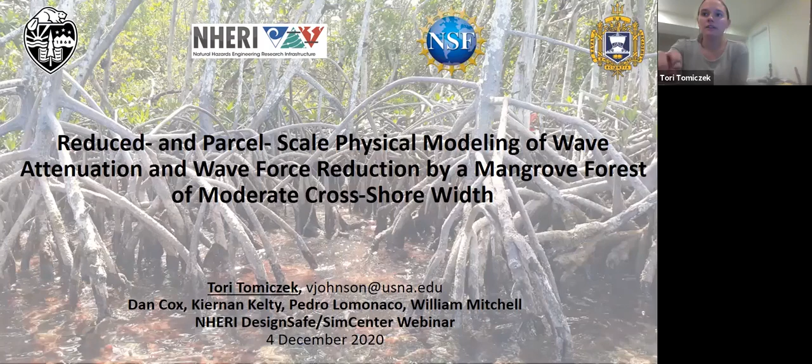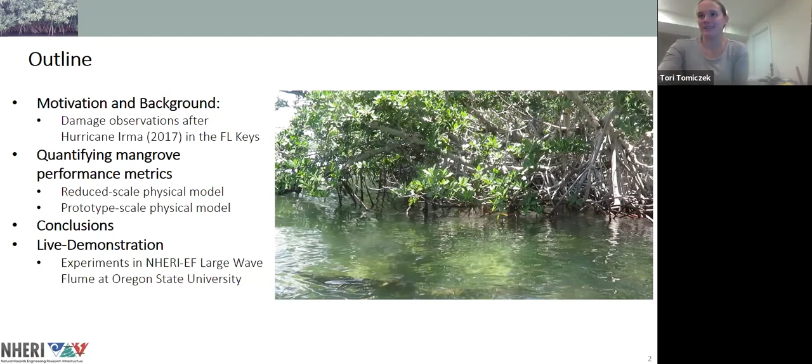Then I'll jump over to a live demonstration where we'll actually show you we're running waves today before sort of wrapping up, and I'm happy to take any questions.

So as Matt mentioned in the introduction, natural and nature-based features are an emerging area of research for coastal resilience and coastal hazard mitigation. It's very important to understand how these systems perform, not just from an ecological perspective, but also from an engineering perspective in terms of wave energy dissipation, load reduction, and flood storage capacity.

Here you can see some of the examples of natural and nature-based features implemented in urban environments. These are concept designs right now, but I think these designs are moving forward, such as the Big U in New York City, the Emerald Tutu in Boston Harbor, as a design idea. And also this Fort Pierce Marina, it's actually a constructed island living breakwater that's being used to protect the marina. This was identified in the NHERI 5-year science plan as an important area of future research.

The background and motivation for this study again occurred after Hurricane Irma in 2017. Here you can see some of the hydrodynamic conditions that occurred during Hurricane Irma. The track of Hurricane Irma is indicated by the black line you can see in each of the panels. And we've plotted the Coastal Emergency Risks Assessment hindcast of the inundation depth, significant wave height, and wind speed produced by the storm. Our study area was Key West and Big Pine Key, which are indicated by these black boxes in each of the panels.

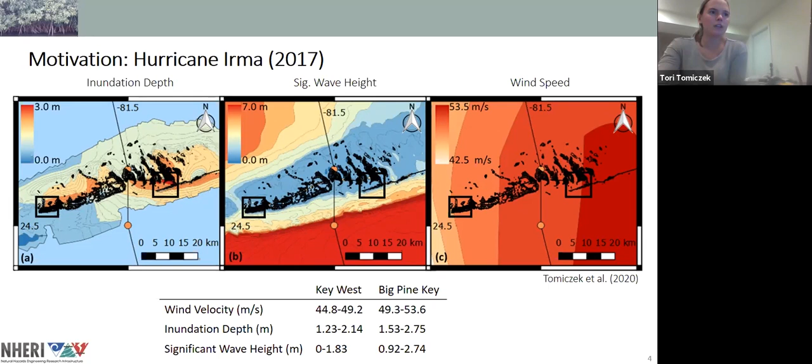We, after the storm, performed damage assessments, evaluating damage on a 4-point scale to the roof, walls, landscaping, and attached structures, foundation, and also the shoreline. Our goal here was to understand relationships between shoreline damage, structural damage, and hazards, as well as to understand how shoreline management could affect damage and recovery.

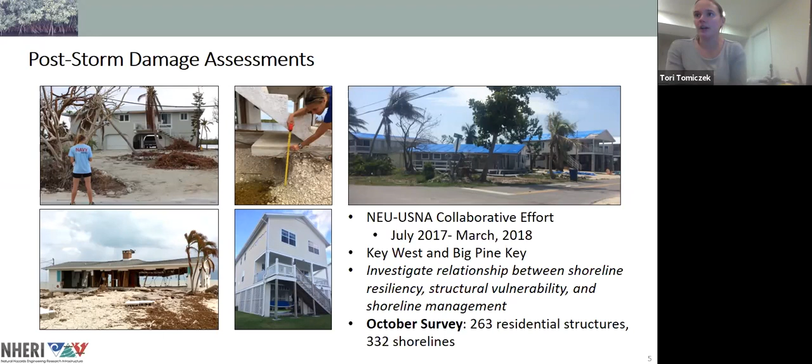We were able to survey 263 residential structures just 1 month after the storm made landfall. We actually arrived in the Florida Keys the day that they reopened to tourism, and so we were there before many of the reconstruction activities had started to take place. We also performed assessments of individual shorelines.

One thing that's very unique about the Florida Keys, you can observe in the picture on the upper right-hand corner of this slide. This shows an overhead view of one of the neighborhoods in Key West. This is actually a Naval Air Station housing facility where you can see, as is common with many naval stations, all of the building footprints look nearly identical.

But what's very different about each of these building parcels, particularly the waterfront parcels, is that as you move from the northern to the southeastern edge of this shoreline, you see a wide variety of shoreline archetypes. So this top one here has a sandy beach. We have mangroves as you move further south, and then finally stretches of revetments with sparse mangroves in between. And this was very common, this parcel-scale shoreline variability.

I've shown you some pictures of the damages that we observed for various shoreline archetypes. Overall, one thing that really struck us during this field trip was how well mangroves performed during the storm. Only 1 month after the storm, we already saw signs of regrowth, and many of them looked unaffected by the hydrodynamic and wind conditions associated with Hurricane Irma, particularly in Key West, where the wind was not quite as extreme.

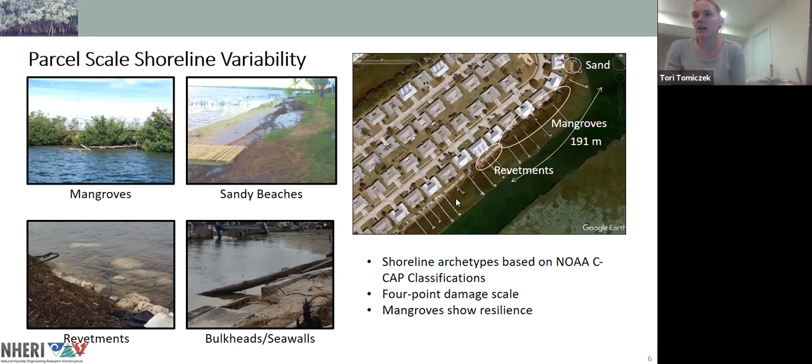Sandy beaches tended to be completely washed away, completely eroded after the storm. This may be in part due to the fact that Key West is built on lime rock, and so there's not a lot of native sand to the area, and so most of the sand was just washed right offshore. We also observed damage to revetments and bulkheads in the form of partial collapse of bulkheads, stone displacement in revetments.

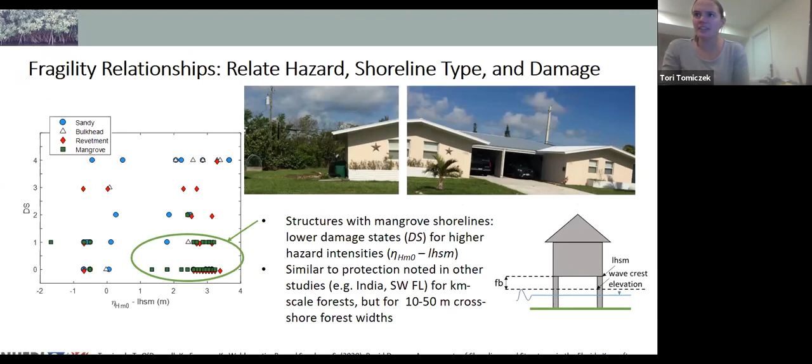In our initial assessments, we attempted to relate the hazard intensity measures that we were able to obtain from the storm hindcast to the damage condition observed by the storm. And so the hazard intensity measure that we defined was the freeboard, which we defined as the elevation of the wave crest above the lowest horizontal structural member.

So this elevation of the wave crest eta minus the elevation of the lowest horizontal structural member above ground. As that gets bigger, more and more of your house is inundated by the wave. So what we expected to see was, as this parameter increased, more and more structures experienced high damage. If you just look at this figure right away, it looks a bit like a cloud, which was somewhat discouraging at our first pass.

It wasn't until we separated each of our structures by its shoreline archetype that we realized that most of the structures that experienced these severe hydrodynamic conditions but low damage states were structures that had mangrove shorelines, indicating that mangroves had provided some sort of protection during the storm. And this is actually not so new.

There's a lot of other excellent studies out there that noted similar protection by mangroves during hurricane as well as tsunami events in Florida and Asia. But these studies often noted this protection occurring over kilometers of mangrove forests rather than the football field size mangrove forests or even smaller cross-shore widths that we observed in the Florida Keys.

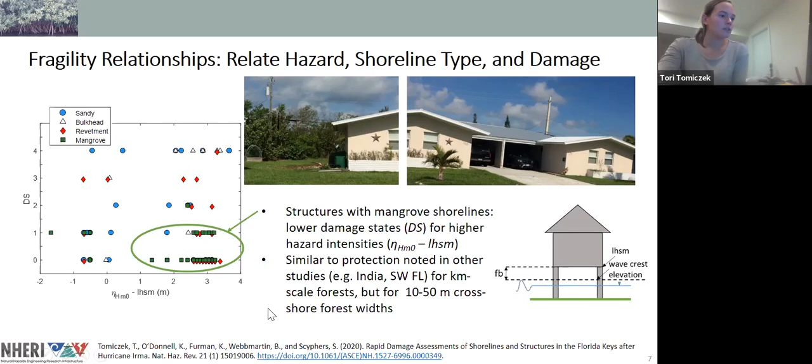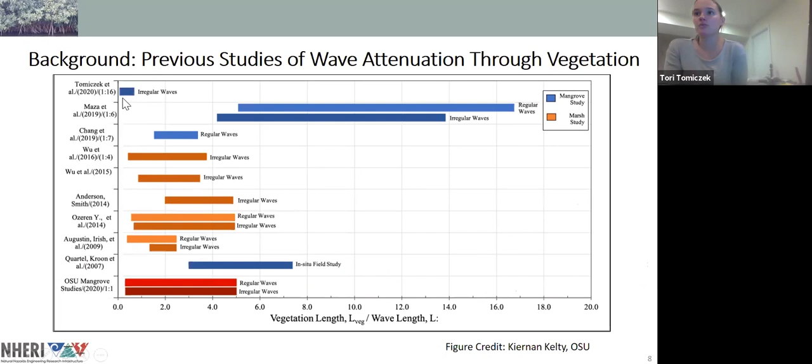And so here you can see again some other previous studies of wave attenuation through vegetation, with many of them focusing on long mangrove or vegetation widths compared to the wavelengths. We were observing this protection occurring at fractions of the wavelength. And so this is what we set about to do with our reduced scale physical model. Before we could build our reduced scale physical model, we actually went back into the field to learn a little bit more about mangrove geometric and mechanical properties.

So we went out to the field and we measured mangrove prop root diameters, trunk diameters, prop root density, as well as elasticity. We also consulted some excellent literature sources that talk about how to parameterize a mangrove tree based on the diameter at breast height. And we constructed a 1:16 scale of the mangrove forests that we observed in Key West, which you can see here.

One thing you'll notice right off the bat is we removed the canopy. In part, this was because we didn't want to worry about the scaling effects, and also because most of the hydrodynamic properties owing to the storm surge and waves were interacting with the trunk and prop roots.

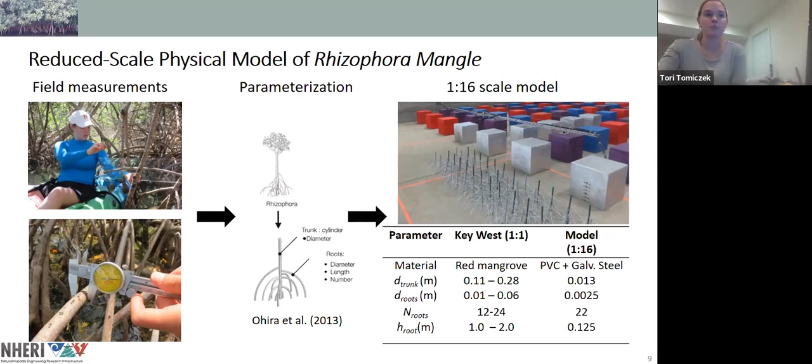These experiments were actually part of larger tests at Oregon State University. These were done in collaboration with Oregon State University, the University of Notre Dame, University of Southern California, University of Hawaii, and Hanyang University. And they investigated things including macro roughness, effects on hydrodynamic transformation, effects of seawalls, debris, and then we included the vegetation component.

One thing that was really exciting about this test setup is that we were able to use 2 pumps, which we installed behind these wave dissipating revetment structures, and they allowed for the creation of a continuous flow so that we could superimpose waves over trailing currents.

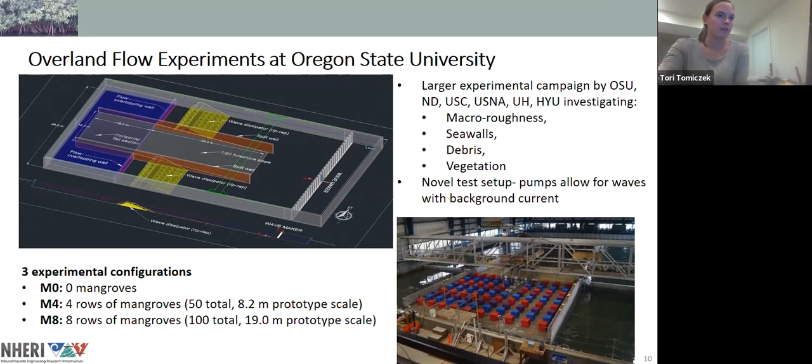We considered 3 experimental configurations placed directly in front of the macro roughness elements on the horizontal test section. The first one, our baseline configuration, considered 0 mangroves. Our second configuration considered 4 rows of mangroves, which corresponds to about an 8-meter prototype scale width. And our third configuration considered 8 rows of mangroves, or 19 meters of cross-shore width of mangrove protection.

Here you can see another close-up view of our mangrove specimens, as well as some of the instrumentation we used during the tests. We considered a lot of instrumentation used solely to characterize hydrodynamics, including acoustic Doppler velocimeters, wire resistance wave gauges, and ultrasonic wave gauges, which were positioned both along the slope to characterize wave transformation, as well as in front of and behind the mangroves to determine effects of the mangroves on wave transformation.

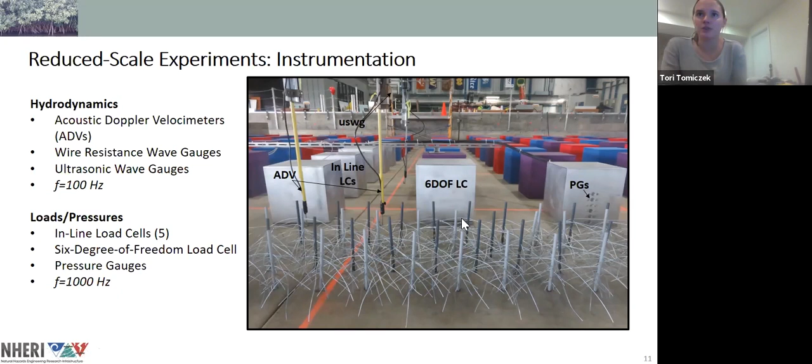Each of these silver structures was also instrumented with either a load cell or array of pressure gauges. The one that was shielded the most by the mangroves was the 6 degree of freedom load cell, which is the one that I'll be showing in a couple of slides.

Here you can see a video of the tests, as well as the 3 different wave configurations that we considered. I'm going to let the video play again, but when I do, have a look at how the splash up changes as you look at the shielded silver boxes compared to the unshielded red boxes.

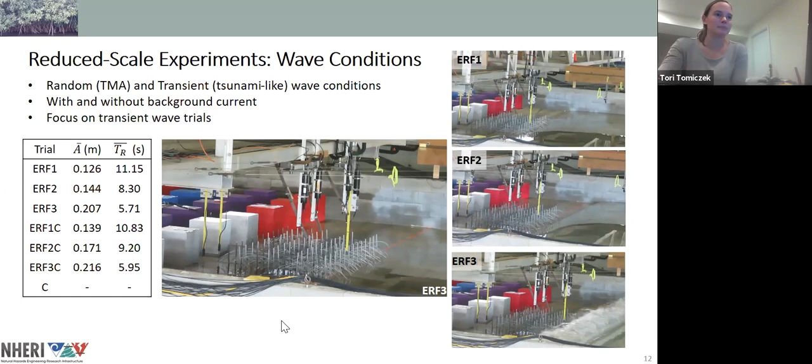All right, it might be having an issue with the playback, but I can tell you that the unshielded boxes actually had a very noticeably larger splash up than the shielded boxes, which was observed for all of our wave trials. We considered irregular as well as long tsunami-like waves. Today I'm going to focus on the tsunami-like wave conditions, in which we increased the wave period while reducing the wave amplitude.

Here you can see a time series of the water surface transformation behind our mangroves. This is located at a gauge in a side street directly behind our mangrove configurations, as well as the cross-shore velocity transformation as you move from a no mangrove case to 4 rows of mangroves to 8 rows of mangroves. The black lines in each of these time series indicate the 0 mangrove case, while the blue dashed line and orange dash-dot line represent our 4 rows of mangroves and 8 rows of mangroves, respectively.

One thing that we can notice right away from these figures is, considering the water surface elevation, we actually see an increase in water level behind the mangroves when we added mangroves compared to the 0 mangrove case. We also observed that there wasn't a large difference between the M4 and M8 configuration, indicating that adding mangroves had more of an effect than adding more mangroves. So the presence of mangroves was more important than the 2 different cross-shore

widths that we considered. Similarly, we observed for the water velocity that the water velocities tended to decrease more quickly when you added mangroves. But again, there wasn't a very large difference between the M4, 4 rows of mangroves, or 8 rows of mangroves.

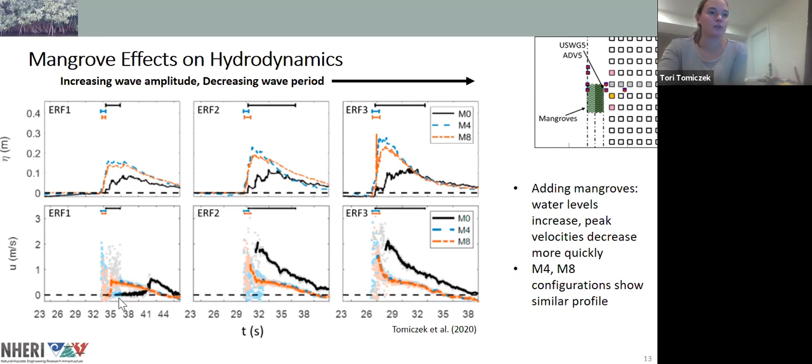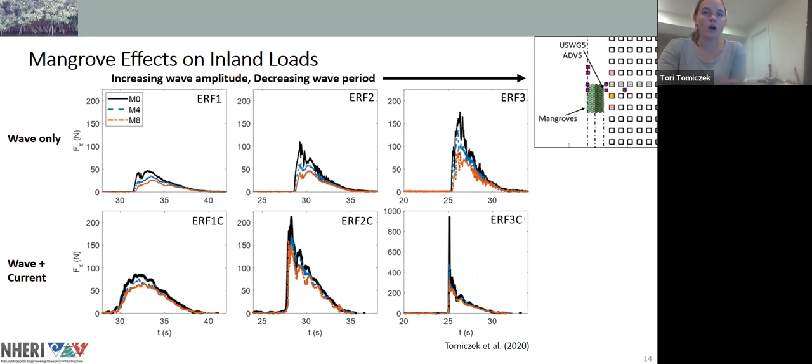We also considered mangrove effects on inland loads using the 6 degree of freedom load cell that I showed a couple of slides ago. That's shown here in this gold box. And again, we can see that as you move from the M0 or black lines for all of the wave conditions tested to the 4 rows of mangroves to 8 rows of mangroves, we see a clear reduction as you add more mangroves.

This is good to show qualitatively, but we also were able to quantify that reduction by comparing the actual force measured against the increasing wave period, as you can see in this left-hand panel. And so in this left panel on the x-axis, we have our representative wave timescale, and on the y-axis, we have the cross-shore force measured by the 6 degree of freedom load cell. Black circles indicate our no mangrove baseline configuration. Blue triangles indicate our 4 rows of mangroves, and orange squares represent 8 rows of mangroves.

The shaded symbols indicate trials that we ran in the presence of a background current, while the hollow symbols indicate trials that we ran with just waves over still water. And you can see that for all of our cases, as we added mangroves and added rows of mangroves, we saw a reduction in overall force. So these vertical lines indicate the same trial adding mangroves.

We also see that as the wave period increased, the total force on the structure decreased in general. This was in part due to the fact that we also reduced the amplitude as we increased the wave representative timescale. This right-hand panel shows our cross-shore distance of shielding mangroves on the x-axis and our force on the y-axis. So you can follow a similar wave condition by following the same symbol.

So our ERF3 was our shortest wave with the largest amplitude. We see it has a very large force when there's no mangroves, which is reduced quite a bit when we added 4 rows of mangroves, and even more when we added 8 rows of mangroves. But one thing that we noticed about all of our trials was that this load reduction was not linear.

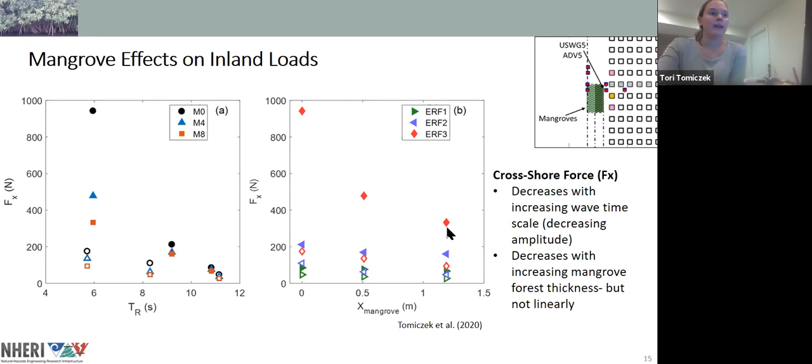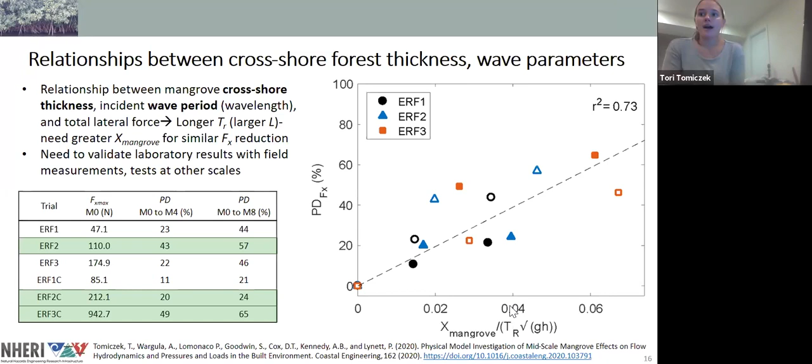While this is promising, there's still a lot of questions that remain. And one of the biggest questions is, how does what we saw in the lab with these reduced scale tests actually scale up into real world mangrove systems? And so one thing that I think is really important to understand in natural and nature-based features is how the work that we're doing in the lab scales up to represent real world systems.

One note that you always have with lab experiments is that it's very, very challenging to match your Reynolds number unless you do this at full scale. And so while our Reynolds numbers for our 1/16 scale tests were high enough to ensure turbulent flow and inertial forces dominated viscous forces, we're still orders of magnitude less than what you would expect in a real world system.

And so I'm really excited about projects that we have ongoing right now with the Army Corps of Engineers and the project that I'll show you at Oregon State University, where we're actually constructing large scale versions of these mangrove specimens to see how wave transformation scales as you move from 1/16 to 1/2 scale to 1/1 scale, which is the test that we're running at Oregon State University.

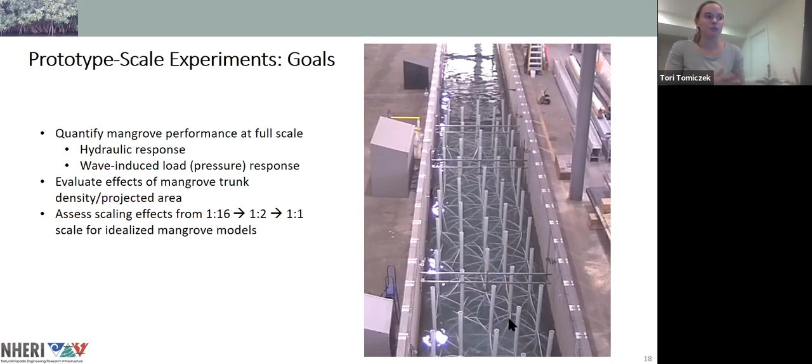And then finally, as I mentioned, we're really excited to assess how these systems, all constructed similarly, scale from reduced 1/16 to large 1/2 scale to full scale that we're doing in the large wave flume. Here you can see a view of the experimental layout.

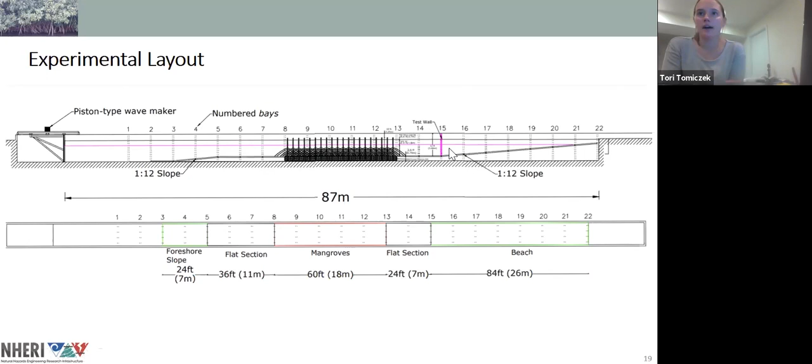We're in the large wave flume, so upon wave generation, waves propagate over a flat section before they go up a 1/12 slope to induce wave shoaling and some wave breaking, depending on our water depths. We then have about 18 meters of mangroves before the waves either just propagate through to the beach or interact with a test wall, which is where we're going to be measuring the loads on the structure. And I'll show you a drawing of that in a second.

We have 3 experimental configurations. And then each of those configurations is with and without a test wall. So we finished all of our trials with the dense configuration of mangroves. And then right now we're testing the sparse configuration where we've removed half of our mangroves in a random pattern. And then our last condition is our baseline condition because we want to be able to characterize the baseline effect of just the flume itself on wave dissipation and see what additional effect the mangroves can provide.

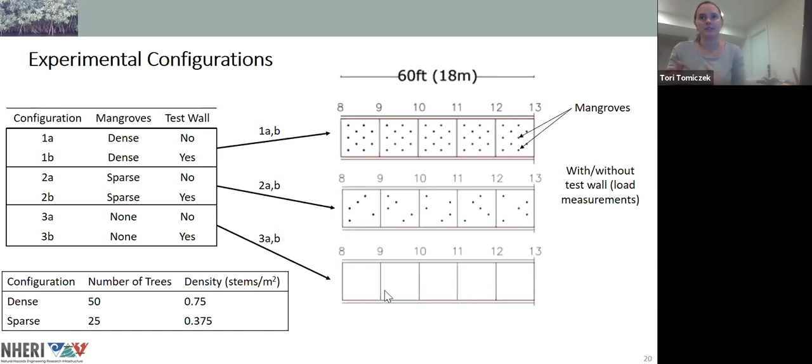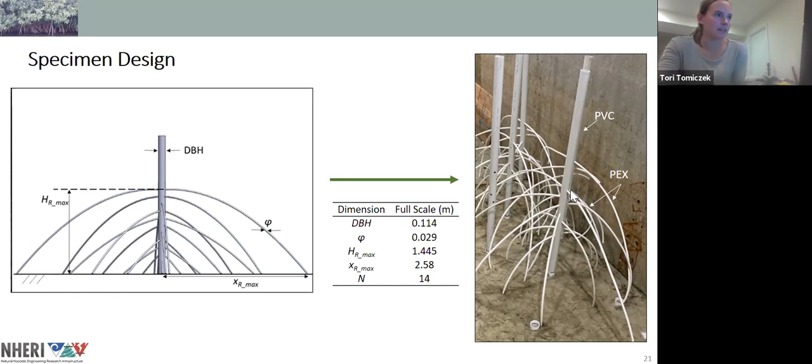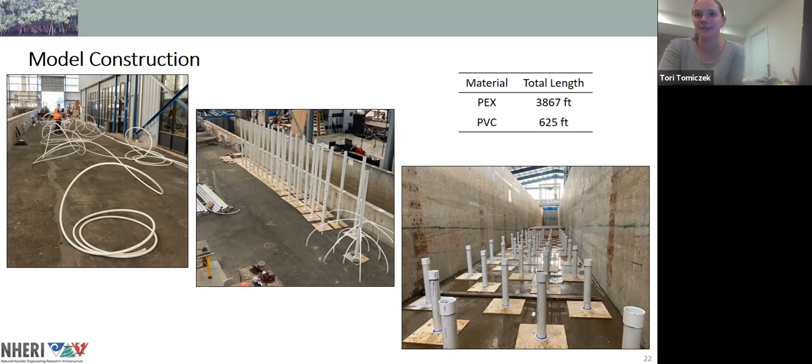Model construction, one of the things as a PI that I wish I could be out for in the age of COVID was to help out with the model construction. It was definitely a ton of work, so I'd like to acknowledge Kieran especially, but also his whole team who were working to make the PEX rigid, string it through, and then install the mangroves. Here you can see just a couple images, but I'd like to call out almost 4,000 feet of this PEX material that needed to be cut and installed within these mangrove trees.

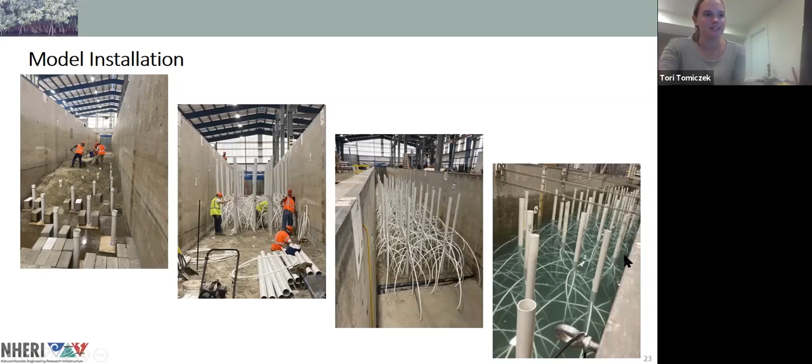Another advantage of the lab is that by constructing these trees directly in the lab, it allows us to characterize the tree from the baseline of the roots up until the top of the highest prop root. This is really challenging to do in the field because you're always working around high and low tide, and you're never really able to get a fully drained flume like you can here. And so what we're able to do is get a clear variation of the projected area as you move up and down the vertical water column, and determine how that's going to affect the blockage that's provided based on the projected area of the trunk and root system.

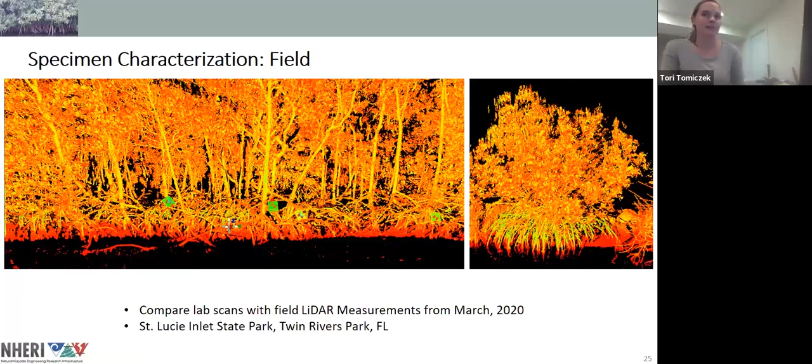Ultimately, we're going to be comparing these LiDAR measurements that we're taking in the lab with LiDAR scans of mangrove trees that we obtained in the field. These are images from March 2020 in St. Lucie Inlet State Park in South Florida. And so we're hoping that we can get very similar blockage areas that we're testing in the lab, and then also that we're verifying with field measurements.

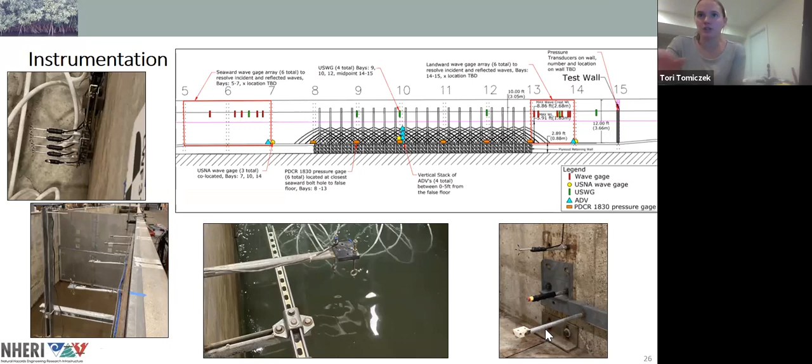Also using wire resistance wave gauges and pressure gauges, which I'm very excited about because we're using these pressure gauges in the field as well. So it will give us a really good validation of these pressure gauges for use in the field.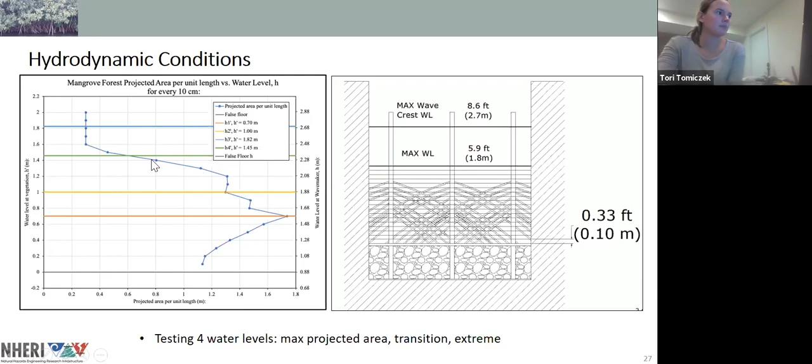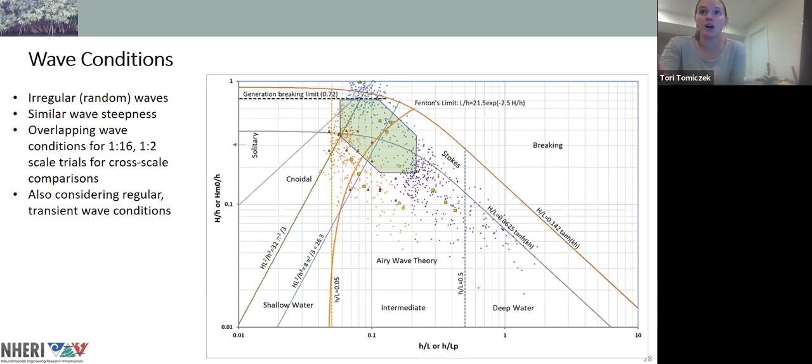You can also see in these clouds, we're expecting a wide range of wave conditions ranging from various nonlinearities and also non-breaking as well as broken conditions.

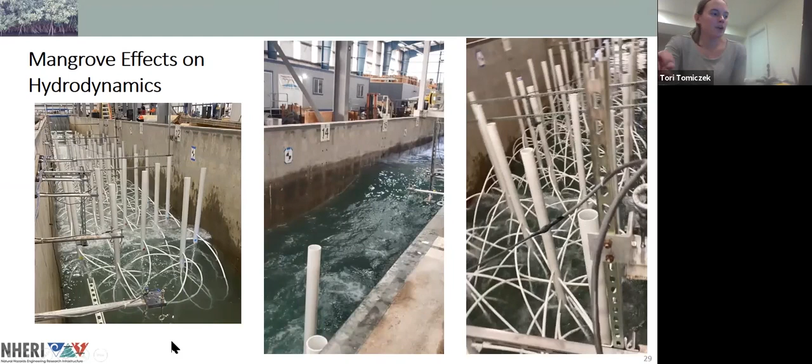We're also considering wave interaction with the structure after it has been transformed by the mangroves. And I think this is a really exciting application because we're hoping to translate this into informative design considerations for hybrid systems, mangrove plus seawall, or how waves interact with the built environment using natural and nature-based features. You can see our test wall at the back of this image here. And at the front of this image, the waves are coming from the wave maker and then moving through the mangroves and interacting with the test wall.

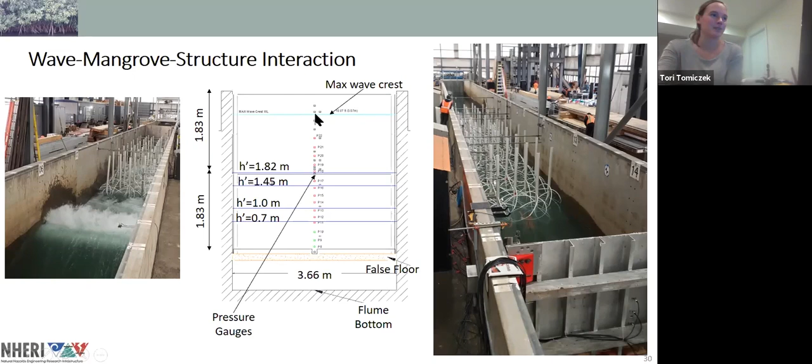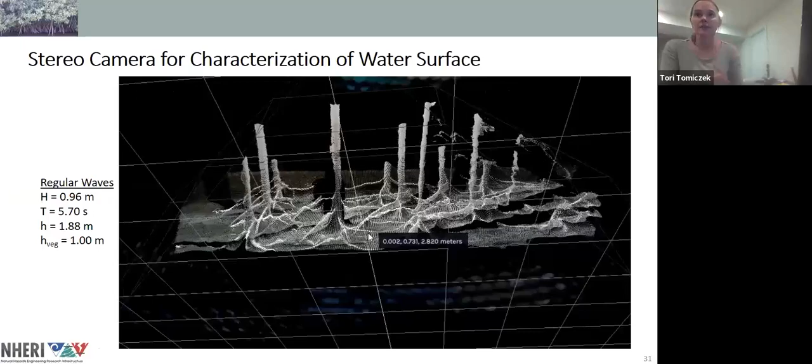And some other things that we're doing with experiments is testing out new technology. So this is a really exciting application using stereo cameras to characterize a 3D point cloud of the water surface. This is showing a video for regular wave trials. And we're hoping that we can get some quantitative data that allows us to compare how the water surface transformation is occurring at this specific location as you consider different wave trials, different mangrove densities and different water depths.

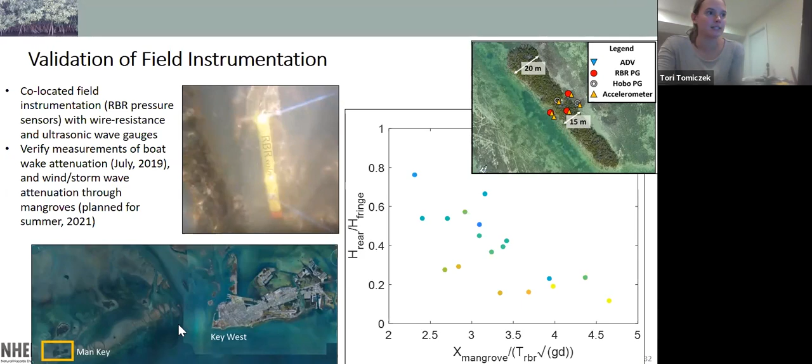As I mentioned, we have some overlapping water depths and wave conditions, which I think will be a really nice way to actually characterize exactly how scaling effects come into play.

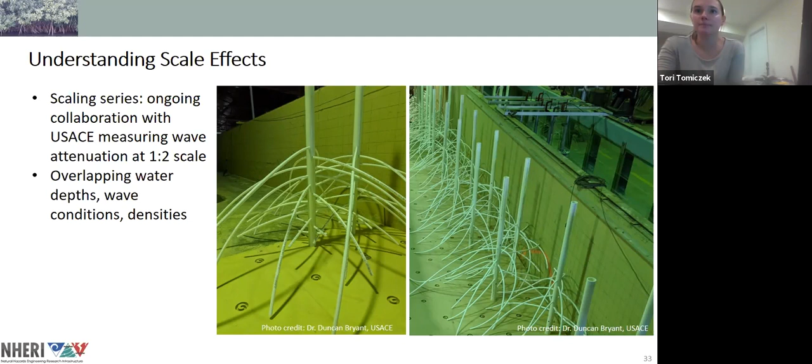The other exciting application I wanted to talk about is a collaboration with the SimCenter using the UQ tool. Dr. AJ Harris from UC Berkeley is working to create a digital twin of the large wave flume. And the vision for this tool is for experimental PIs, such as myself, to be able to directly import our data into DesignSafe, into the data depot on Design Safe, and then use the high performance computing workspace on Design Safe to allow for cloud-enabled simulations.

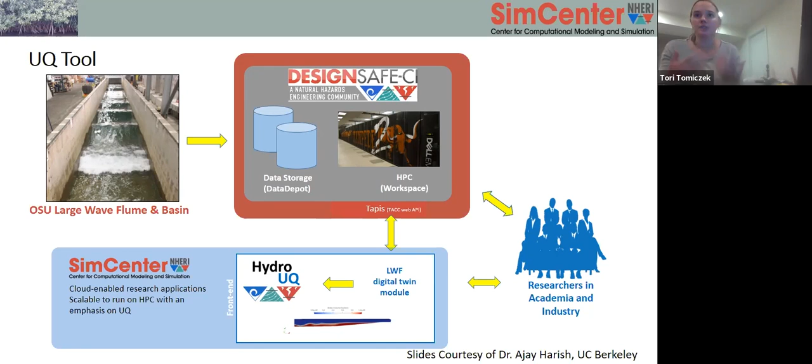Here you can see one of the versions of the HydroUQ tool. This tool is designed to characterize the building response based on shallow water as well as high fidelity numerical models. And it's a really collaborative process. So one thing that the SimCenter has expressed a lot of interest in is getting feedback from PIs.

And so if you have things that you're interested in modeling or that you're interested in putting into the HydroUQ tool, I definitely recommend you go to the website, and they have a survey where you can give feedback and provide a wish list of what you'd like to include in the data.

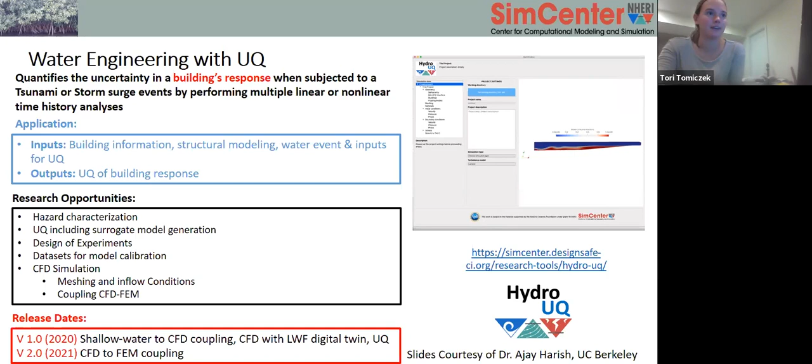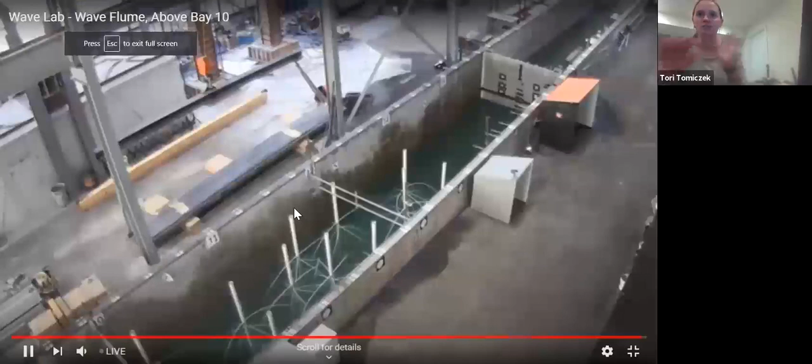So now we're going to jump over to the live demo. I posted the link in the chat just a couple minutes ago. I'm going to stop sharing my screen and jump over. Pedro, thank you for turning on your video. And I think I stopped my share, so I'll escape from mode here and jump over to our view of the large wave flume. Let's share. Lab, and then I'll put this in full screen mode. If you'd like to view this on your own browser, just in case there's any connection lag, feel free to do that. The waves I think are generating, it takes a couple seconds for the video to actually upload the feed. You can see it on Pedro's camera, so feel free to blow up his camera.

But as a PI, it's been so useful for me to be able to check out the live stream. I've definitely been able to feel like I'm involved in experiments, even though I can't travel owing to COVID-19 restrictions. And I think this has been just a great tool to really continue to stay up to date with what's going on with the experiments. So the waves should be coming soon. You can see them on the screen. Here we go.

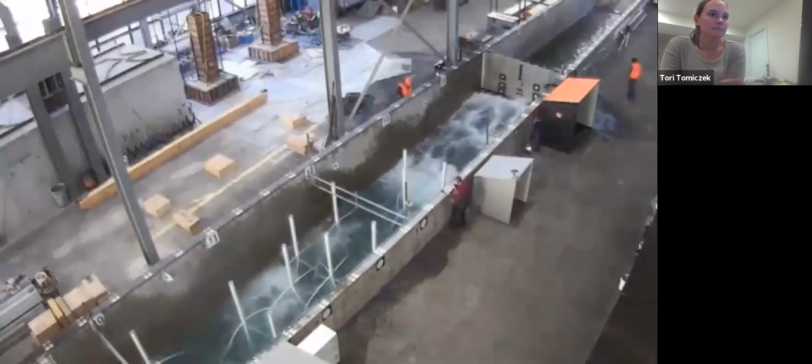Tori, this is Matt. While we're watching the video without sound, maybe we could answer some questions that the attendees here have had. Is that okay? Yeah, that sounds great. Do you want to talk a little bit more about the tests going on? Oh, yeah, I'm so sorry.

Thanks so much. So the tests that we're doing, I'll just share briefly, and then we can also answer some questions. The test that we're doing right now is at our intermediate water depth. So the water depth at the vegetation is about 1.45 meters. And our wave period is 6.9 seconds, and our wave height is 0.92 meters. So these are definitely some good waves to show lots of breaking going on, lots of high splash up with the wall.

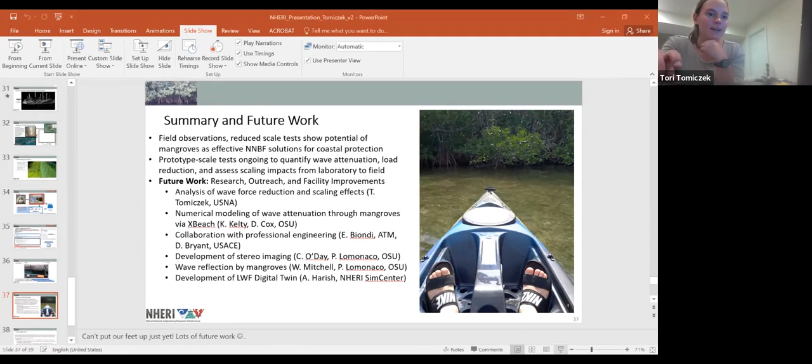I sent a photo to my family of this image while we were doing some field work last March. We can't put our feet up just yet, though. I have to say there's a lot of work to be done to understand how these systems perform. A lot of work from the research side to understand how scaling effects impact laboratory studies, but also can we model these systems and can we quantify the uncertainty and inherent variability within these systems based on mangrove growth patterns

and natural mangrove densities. Also collaborating with professional engineers and engineering firms who are actually doing some design of these systems for coastal protection, I think is really important to continue those conversations. And then finally, just continuing to advance the technology within our own experimental facilities through developments of stereo imaging, through our collaboration with the SimCenter and the Large Wave Flume digital twin.